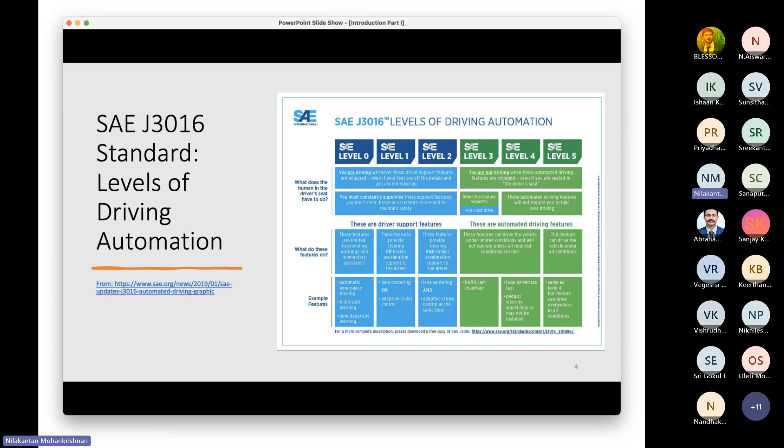Again, in terms of structuring the field that you're interested in, the world of robotics is divided into two areas. One is traditional, has been around, I would take a wild guess, since the 50s or 60s. We've had these robots, robot actuators on the assembly line, spot welding, and doing various other things, the old concept of Henry Ford and the way he changed the way something was manufactured. That is, the part itself moves on a conveyor belt and the human being is rooted to a spot. So those have been around for many, many years. I think they're called robot manipulators.

The idea is that these don't move except the arms move. The base is fixed, is what I meant. So let's quickly compare that versus the mobile robot. You do see a picture of a mobile robot, the bottom of the stack of two pictures. And that's a little bit confusing because it has a robot actuator on top of it. But imagine that we remove the robot actuator, then you have what would be considered a mobile robot.

So let's compare the two categories. And by the way, on the right you have a humanoid. That is the vanity of human beings, we like to see robots that look like us. And that is, I believe, Honda's ASIMO robot. So it stands up and therefore has to balance, which adds a level of difficulty. So let's compare the two.

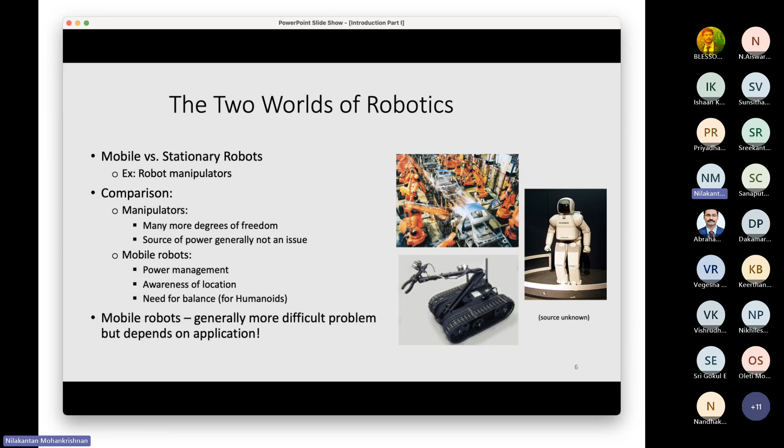So robotics is very interdisciplinary. First, you have the mechanical architecture. That could be how many tires you have, are they steerable, how far apart are they, the drivetrain, etc. And then the kinematics and dynamics of motion.

So we'll get into this later. Kinematics is different from dynamics. You have to know how the thing moves. You can separate them at a very elementary level by saying that if you're moving very slowly, then the dynamics issue is not an issue. But if you're moving fast, then you have to worry about dynamics in addition to kinematics. You always have to worry about kinematics, by the way. But dynamics comes into the picture if you're moving fast.

And then there's the sensors and actuators. What kind of sensors and actuators are you going to introduce in order to make the robot functional the way you want it to be? And then there is control theory, where you can take several courses on their own in electrical engineering. But a robot needs to be controlled in some way so that it does what you want it to do. That's the same for the first area of robotics. You have to control the end effector in some way so that it gets to the target. So control theory is lingering there in the background over everything the robot does.

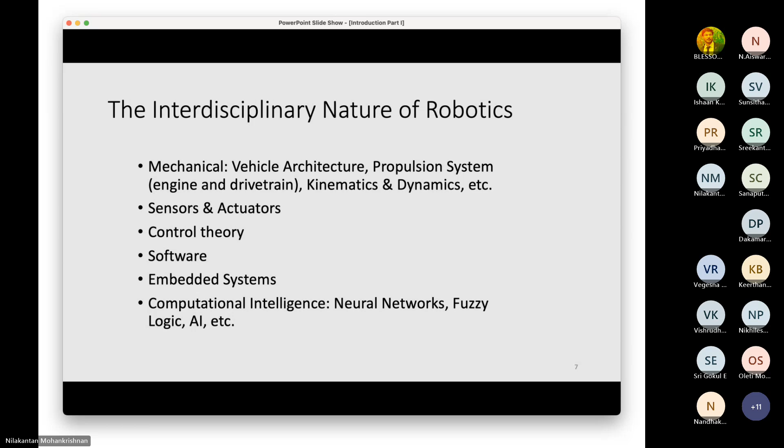The next sub-area is motion control. We already mentioned control, but typically we're talking about motion control. Deep down, there is a locomotion mechanism suited to the mission or task. Here you see a picture of one of the earlier Mars rovers - quite a fancy vehicle with 6 wheels, some capable of independently moving up or down. I guess they think you might have to go over a rock or something, though of course they make sure you're never forced to go over a rock just for fun.

But sometimes it's unavoidable - nothing is left unplanned for the Mars rover, since it's like a $1 billion vehicle. But they do give the tires a certain amount of freedom to navigate small rocks. So how do you control it? The vehicle architecture - how you design it in terms of number of wheels, propulsion, etc - is where you start. Then you figure out a control strategy based on your knowledge of how it's capable of moving. The locomotion mechanism is the system, and you figure out how to slap control onto it for the task - you're not going to run it like a Formula One vehicle. So the control is geared to the architecture, which itself is geared to fulfilling the task or mission.

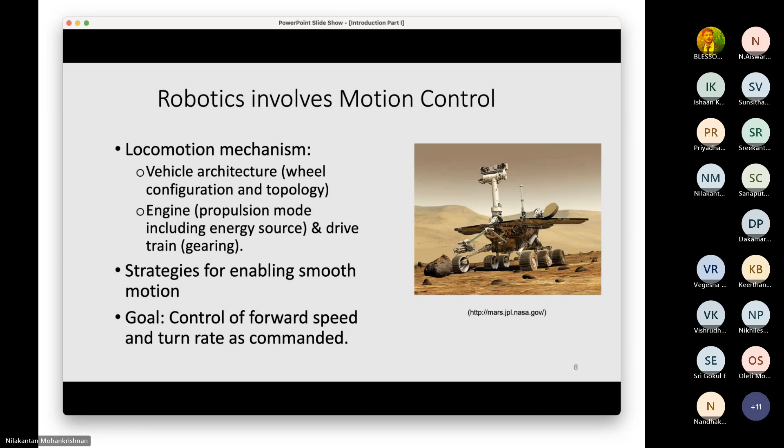Okay, so robotics also involves sensing and perception. I just dropped on the slide some of the most common basic sensors. There could be more exotic sensors, but these are the basic ones.

So you have LiDAR, which can also be three-dimensional. You see a picture of a LiDAR there. It's probably old by now because they are much smaller now. There's also one that is missing, and that is ground radar, which one of my students worked with.

The problem with LiDAR is that it tends to fail in bad weather. So Elon Musk, who owns Tesla, is completely against putting LiDAR on his cars. It's all camera based, optical camera based, because he just doesn't trust LiDAR in bad weather, like snow and heavy rain and so on.

Then on the right, you see a bumblebee camera. It's a stereo vision camera. We use our two eyes to not only view the scene, but also figure out depth. So depth perception is given by our two eyes, and that's what the bumblebee camera is on the right.

And then you have a GPS unit down below. That's the traditional GPS, but now you have something known as RTK, which improves your accuracy.

And then you have wheel encoders, which measure the rotation of the wheels, and in the short term can enable you to project where the robot has moved since the last time you collected encoder information.

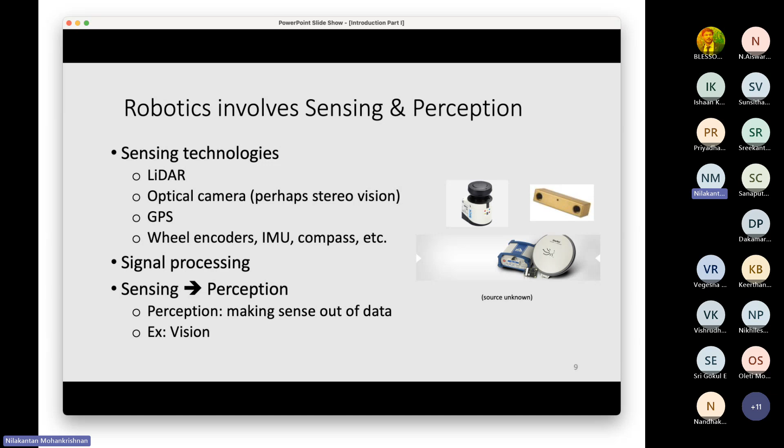And then finally, sensing alone is great, but you really need perception. You need to make sense out of what you see. So a raw image would just be like a lineup of pixels left to right and top to bottom, pixels meaning picture elements with different intensities. And we are so used to seeing meaning in the images that we see that we assume computers can see it too. Obviously that's not true. The computer first only gets the sensed image, and then it has to make some sense out of it. So it's kind of more difficult to get a computer to do what we do routinely.

They created a course in the desert and in fake urban areas, and one of those competitions was won by him. He was the father of the first self-driving car, the Google self-driving car.

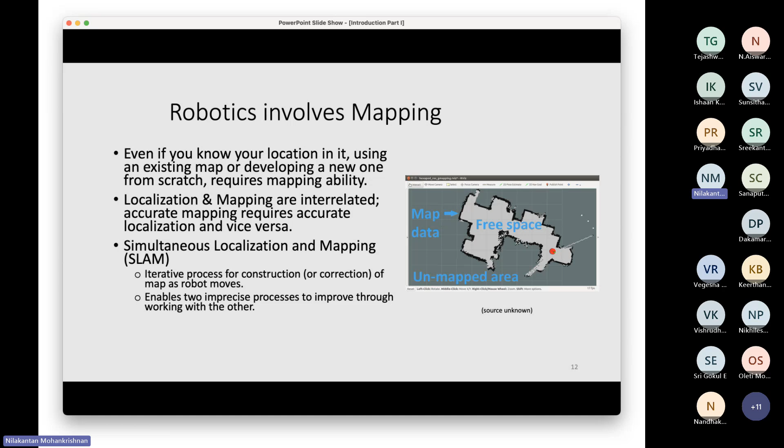SLAM is an iterative process. Construction happens if you did not have a map in the first place, while correction happens if you had a map but you're trying to make sure it's correct or augment it. If you had a moving object that was mapped, the only way to get rid of it is by looking at that spot, seeing nothing there, and wiping it off the map. That happens all the time - you're doing it in your mind as you drive. Things are being put on the map and pulled out of it. Even though these two processes are imprecise in themselves, by locking them together it's possible to have one dependent on the other and vice versa. So you can get fairly decent accuracy if you use localization and mapping in tandem.

I could use an example like making this robot capable of defusing a chemical bomb, but that would be so specific it would be boring for people. Path planning, however, is used by all robots. All robots that move have to use path planning, because in getting from point A to point B, they have to figure out an optimal path, not just a path like a drunkard would adopt - I'm not sure a drunkard could get to the goal, depends on how much he's been drinking. But you need to figure out a path. So that's the example I use.

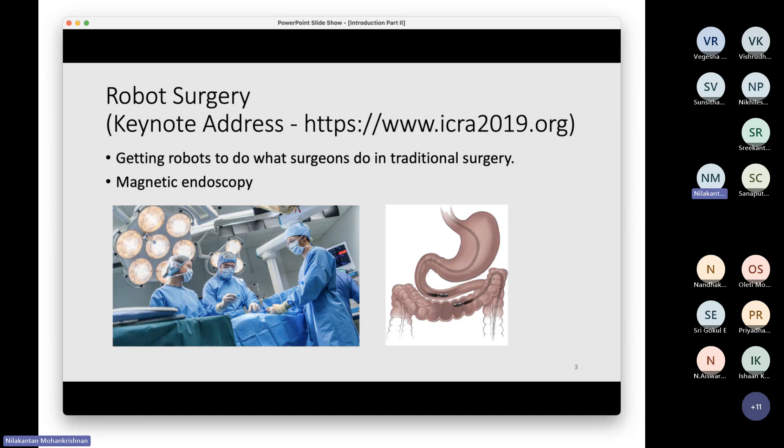So there are all kinds of implications if you can send nanobots into the body and target the delivery of drugs, or even time-target it, meaning you don't want the dumping of the entire dosage, but maybe you want a slow release pill or something. So all of that can be done with nanobots of the future.

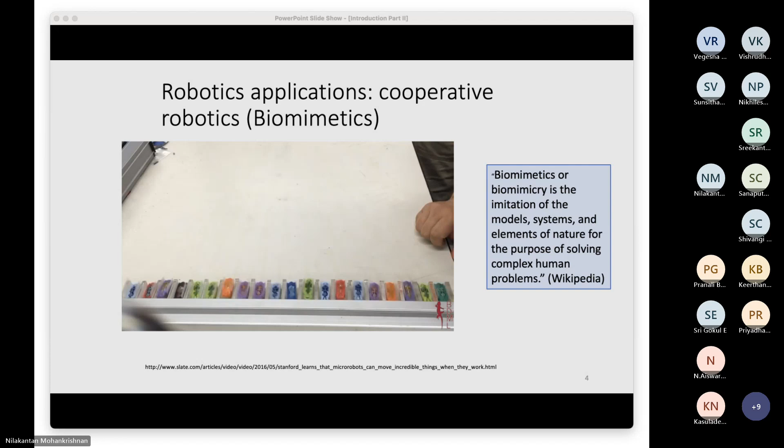So perhaps that's what it is, because I'm opening up more and it says record and transcribe, meeting info, video effects. Is it video effects? Maybe. Could be. No, that's not it. What if I turn on my speaker for this? Then they'll be able to hear it, I think. Shall we do that? I think so. Okay, I think we can give it a try. Okay, hold on a second, I got to start again.

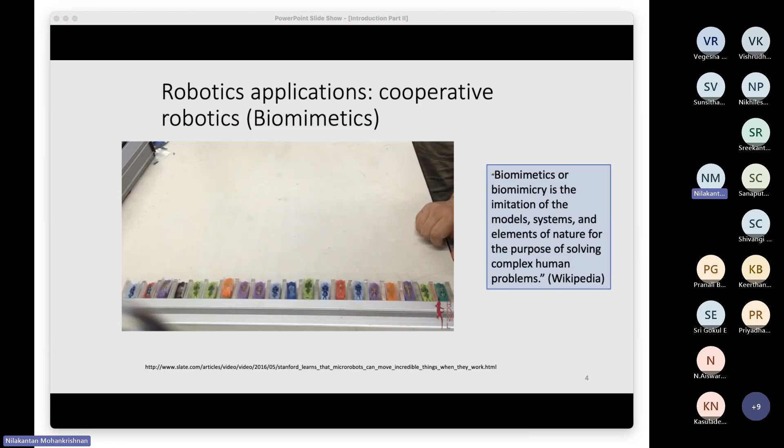Are you still seeing my shared screen? Yeah, I can still see the same screen. Let me pull it back.

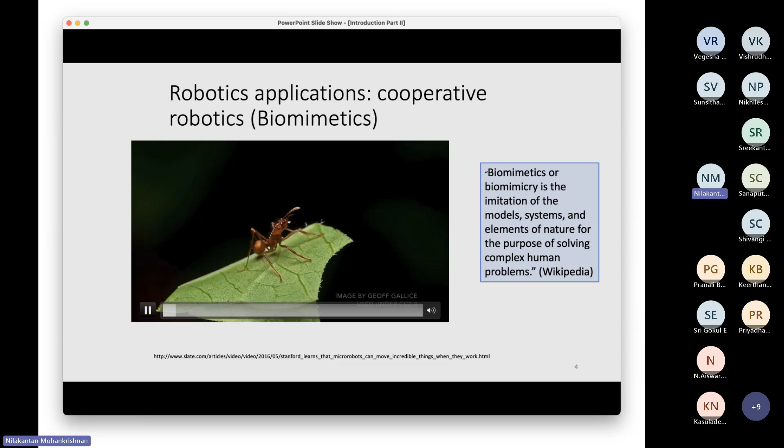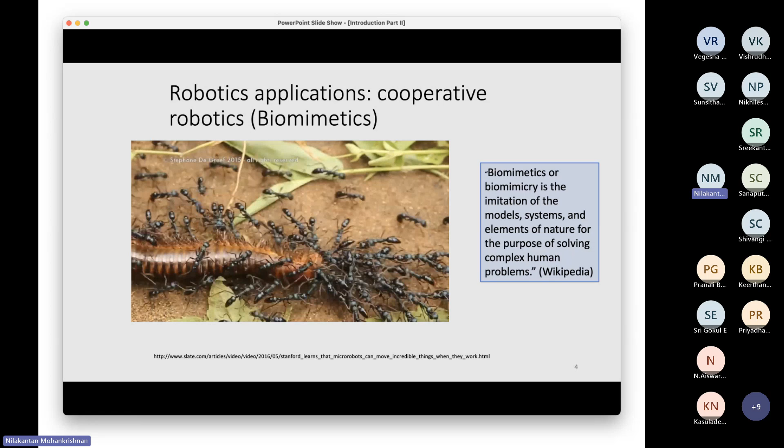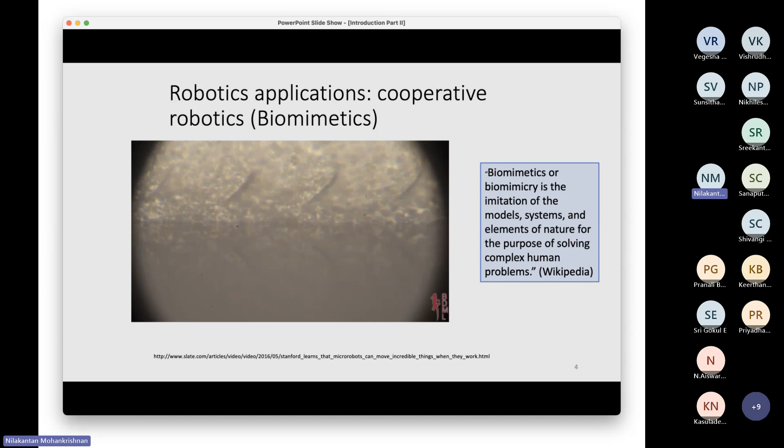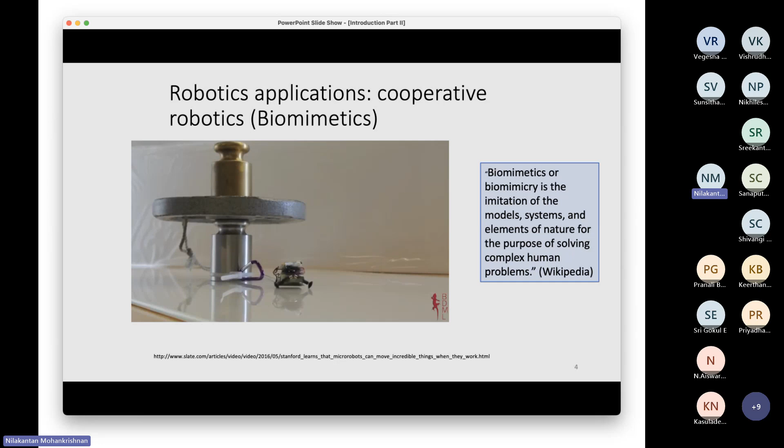Let's try it now. Scientists love studying ants. Known for their impressive strength, ants can lift over 100 times their own weight. Here, a swarm of ants works together as a team to move a giant millipede. With no space to grab onto, the ants make strong chains by grabbing onto each other. Here at Stanford University, we're interested in learning about how tiny things move objects much larger than themselves. Using a special adhesive inspired by gecko toes, our microrobots can move objects over 2,000 times their own weight. The question is, like ants, can our robots work together to accomplish great things? Some microrobots, like these, move forward in jerky jolts. Their forces are strong but short, like the quick beat of a drum, so they don't overlap much and don't work well together.

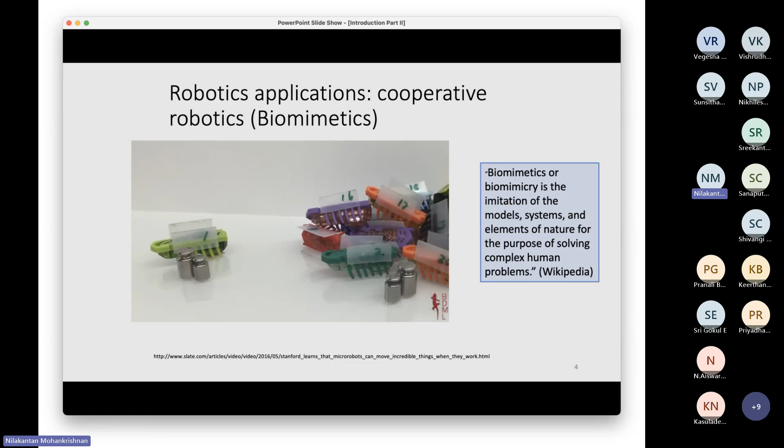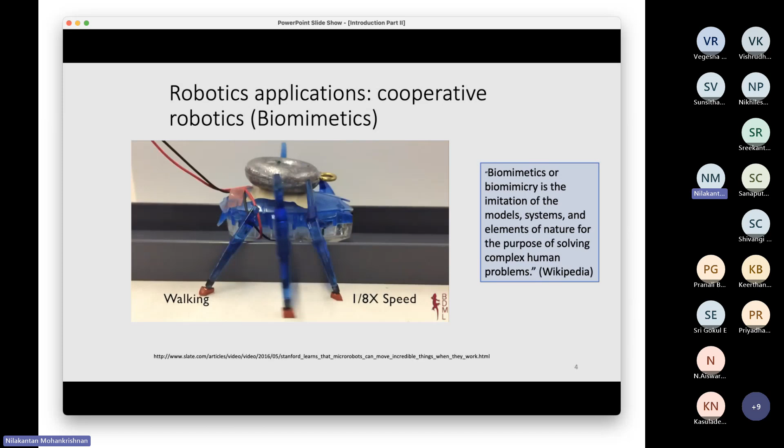20 robots only apply 2 times the force of a single robot. Walking robots like this one apply forces over a longer period of time. Although the forces individually aren't very strong, they overlap with each other more easily, so teamwork is better.

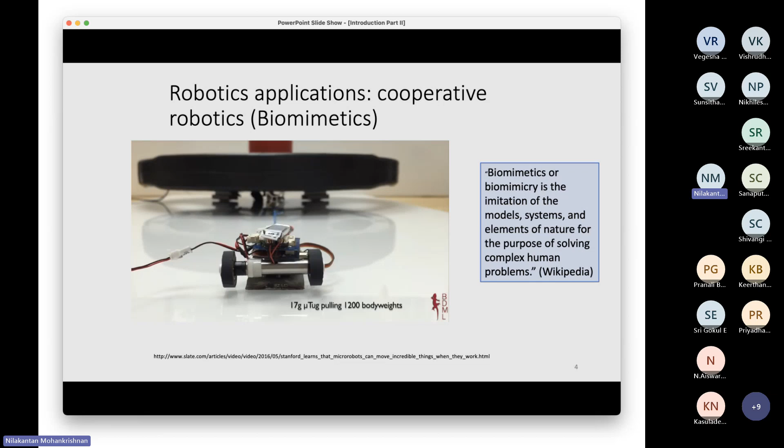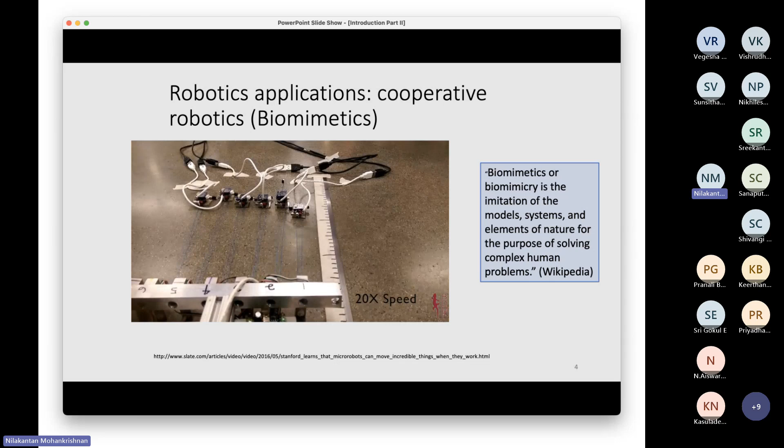After a series of experiments, we found that the best way for robots to work together as a team was to use a very long, very slow, but very steady winching gait, like our team of micro robots here. With near perfect teamwork and impressive individual strength, this team of 6 microtugs, weighing only 100 grams, moved the author's unmodified 3,900-pound, 1,800 kilogram, car and driver, shown here at 20 times speed.

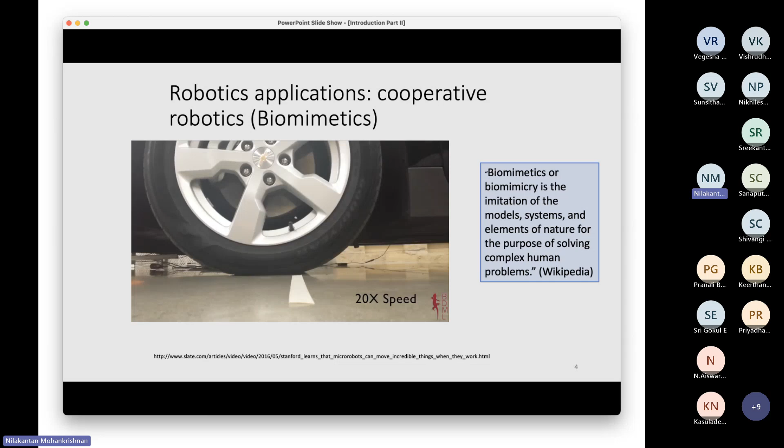Okay. You're able to hear, right? Yeah, we were. Okay, so let's move on to the next slide.

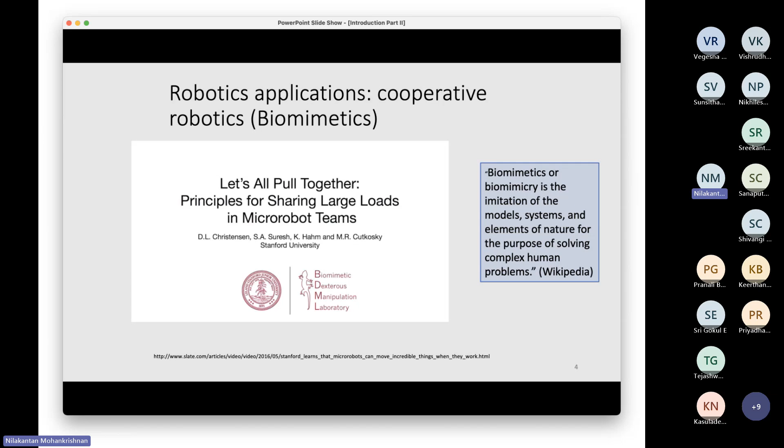Scientists love that slide. Okay, so that is an area called biomimetics. We often look for guidance from nature and then try to make a computer take on the same attributes, because nature is a good place to learn.

But obviously the problem is that animals don't talk to you, and sometimes the animals never even lived in the same era as a human being. So here's an example of a dinosaur, which became extinct before the first human being. The idea here is again, I think from Stanford or one of the elite schools. The idea is to make that little truck have a long tail, because it was surmised that the dinosaurs used it when they jumped off like a short cliff, 10, 15 feet, to prevent themselves from overbalancing. They used that tail and the distribution of weight by moving the tail around in order to keep themselves aligned. So this is from a research paper several years ago.

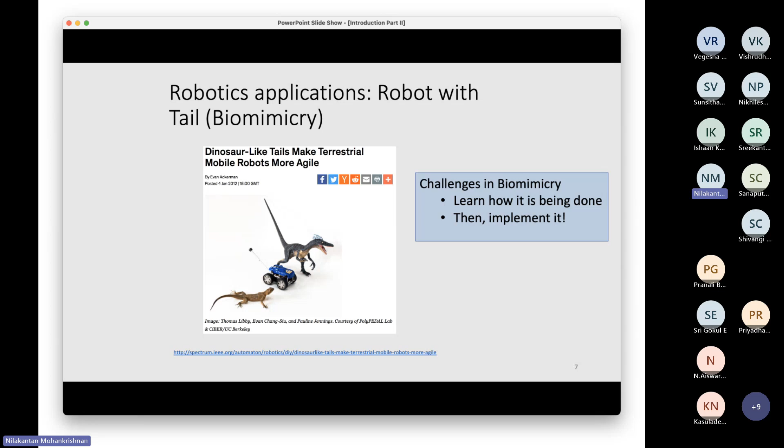So we're going to play this also. And again, you'll be able to hear the audio through my computer pickup.

Are you able to see? No, you can't. Hold on. I don't think you can. We are exploring. Just a second, because it's now going to my browser. Yeah, I think. I think you'll have to share the browser. Yeah, so I got to stop sharing and share the browser. Okay, share. Can you see my browser? Yeah, I can. Okay.

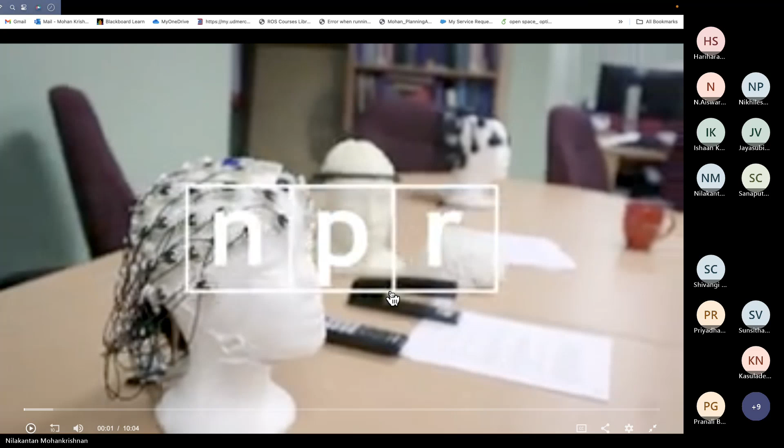All right, picture yourself inside a robotic suit, one that lets you pick up, say, huge, heavy objects, just like a superhero. This is really a thing. Robotic exoskeletons, as they're called, are being used on the floor of hardware stores, also other places like that, so workers can lift heavier loads, and they're controlled by those workers' movements. But the more advanced exoskeletons are controlled by the mind, and they can help paralyzed people, even children, walk. NPR's Elise Hu has been checking all this out for her video series Future You about how emerging technologies could change life as we know it. And Elise is back with us. Hey, Elise. Good morning. Just to be clear, this kind of stuff exists today. And the most promising ones of these exoskeletons are powered with thought control, as you mentioned.

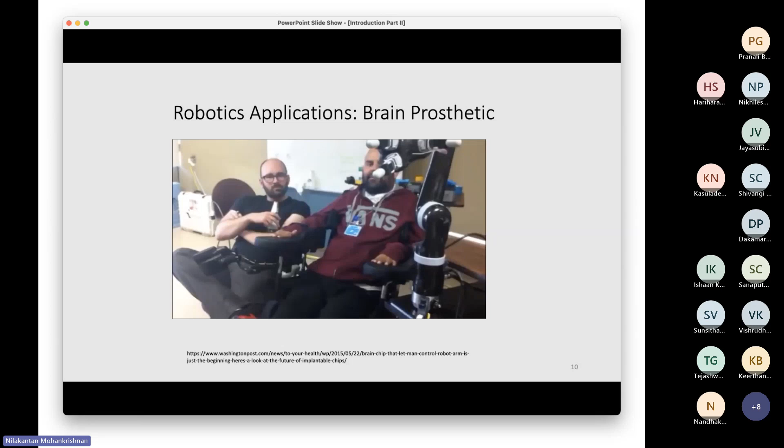So I was saying that this is an older video, same application. I'll let you watch it on your own.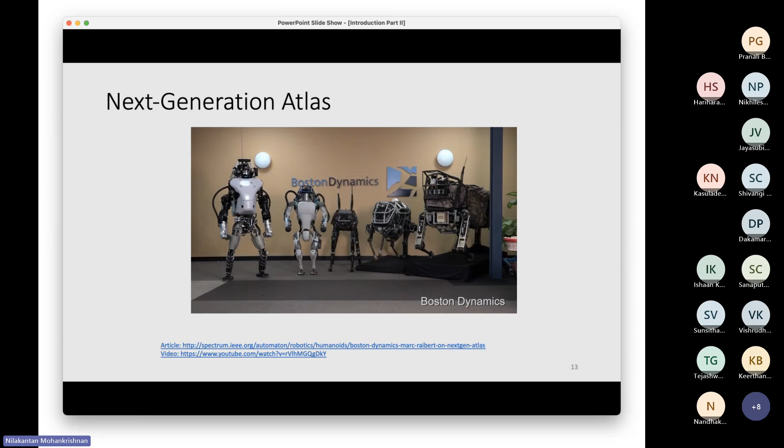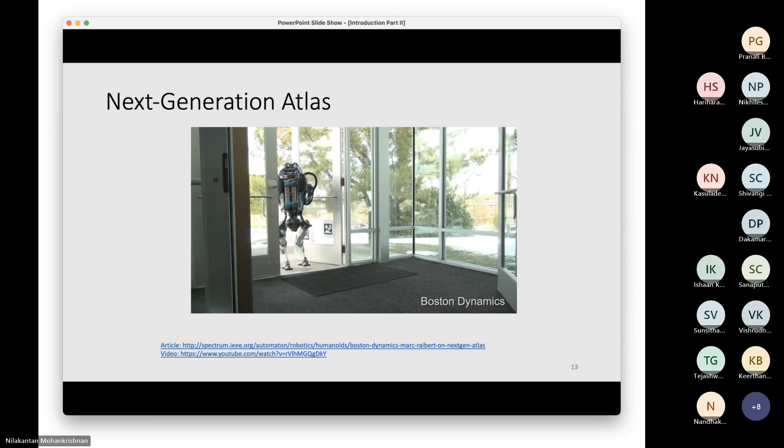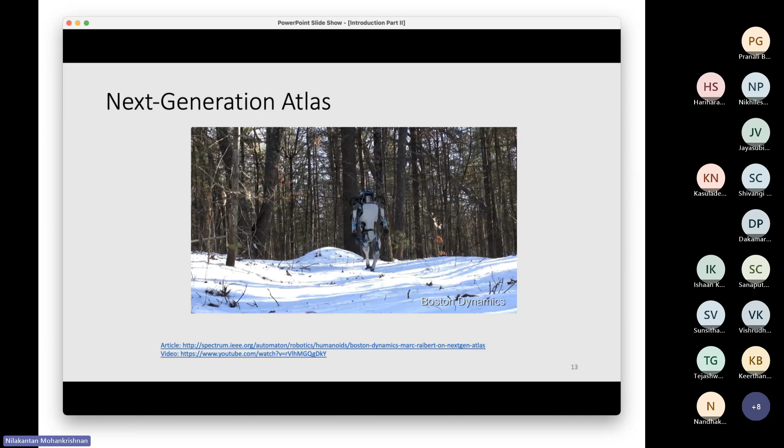Now I wanted to just go to the next slide. Let's watch this a little bit. Luckily I don't have to go off screen. This is from Boston Dynamics, one of the best robotics companies in the world. This is a humanoid robot, and that's a remarkable control system you're seeing. Walking on snow is not easy for many of us, particularly as we get older. Right now it's a curiosity because they haven't found something it can do that is useful for society. It's a curiosity, but I guess the applications are still to come.

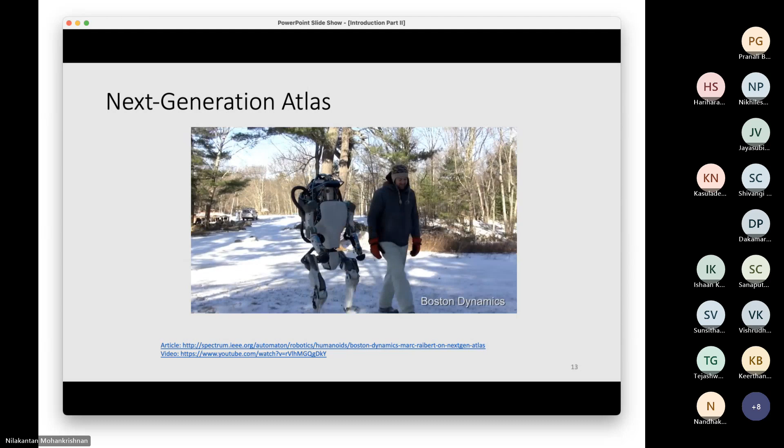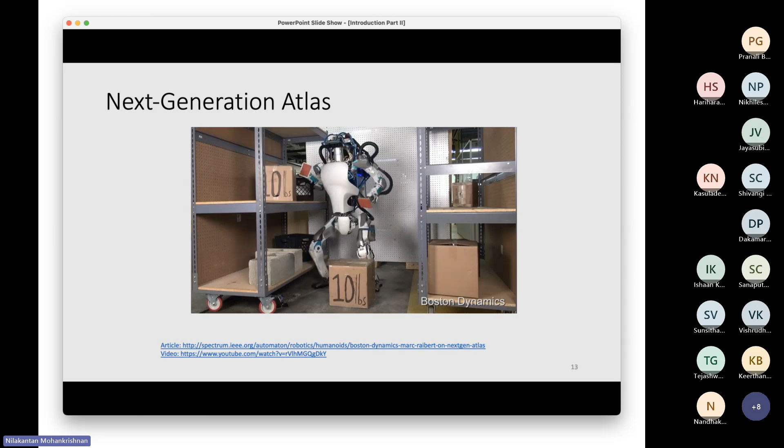That's an elite control system, not something that can be done in the course of an afternoon. I guess the application they are looking towards is some kind of Amazon warehousing task where they get rid of all human beings. I'm joking, but that's obviously the intent of many of these robots.

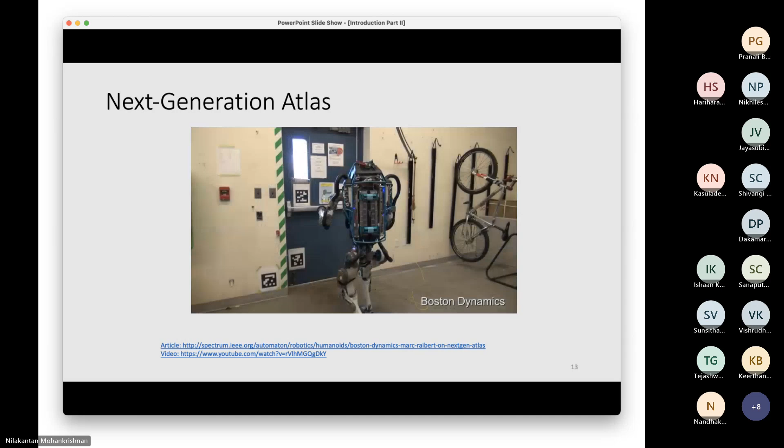Sir, should you just hold on? I kind of muted you because there was feedback, and now I'm unable to unmute you. Could you just wait a second? Can you hear me now?

Okay, so one of the things you may have noticed is that they have reduced the degrees of freedom in the wrist and fingers, because, human beings may disagree, they are generally unnecessary for many tasks. So they've just given it a wrist as it picks up boxes and shelves them. As I said, I went in and out, so I don't know how much of what I said was picked up by everyone. They're trying to create these warehousing robots. The idea is to get rid of human beings. Hopefully they find other jobs for us. But that's the idea, that Amazon will run a warehouse completely with robots and maybe a couple of human beings.

This one I'll let you watch on your own. It's the same robot, the Boston Dynamics robot. I don't know what that particular robot is called. It does an amazing backflip. A robot doing a backflip, one of the most complicated things a human being does, and most of us cannot even do it. They get this robot to do a backflip off a table.

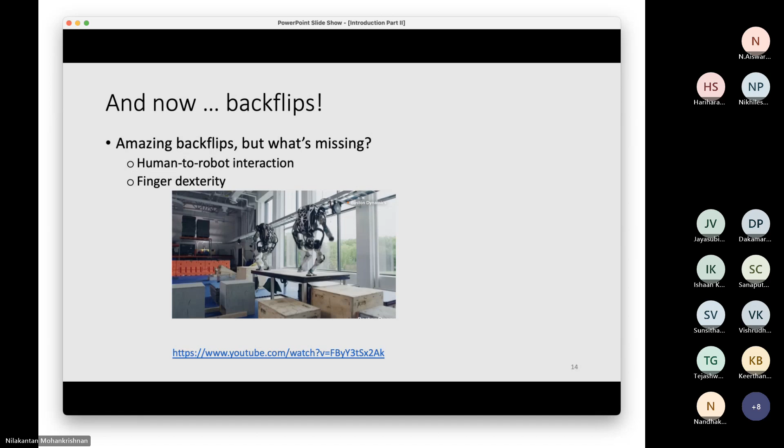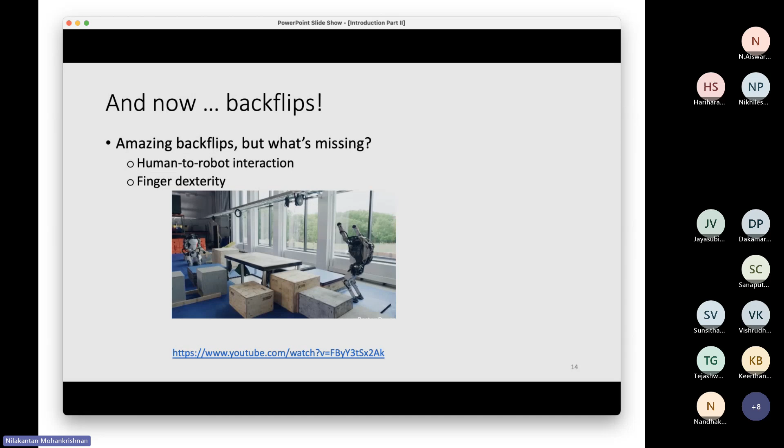Oh yeah, this is the backflip here. This is Atlas, I think. What's that? This is Atlas. Its name is Atlas, I think. Atlas. Yeah, I remember now. Decade of hydraulic humanoid robotics work at Boston Dynamics. Atlas stands about 5 feet tall, weighs about 190 pounds. It's battery powered and hydraulically actuated with 28 degrees of freedom. It has RGB cameras and depth sensors, which provide input to its control system, and all of the computation for control, perception, and estimation happens on board.

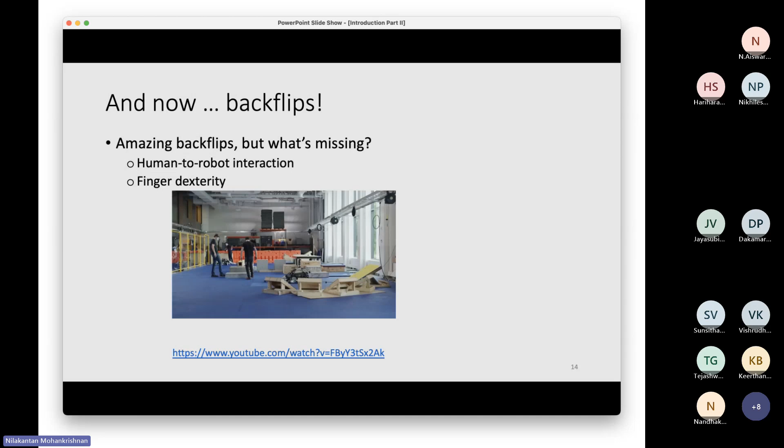Parkour is a useful organizing activity for our team because it highlights several challenges that we believe to be important. First, how do we build a high power density mobile robot that's capable?

Okay, so you get the picture. The point is, people don't have time to burn funding them unless you can turn it into money some way. So it's kind of a nice curiosity, but they might just be about to turn the corner in terms of making it produce a revenue stream. Because otherwise, even venture capitalists will not fund forever.

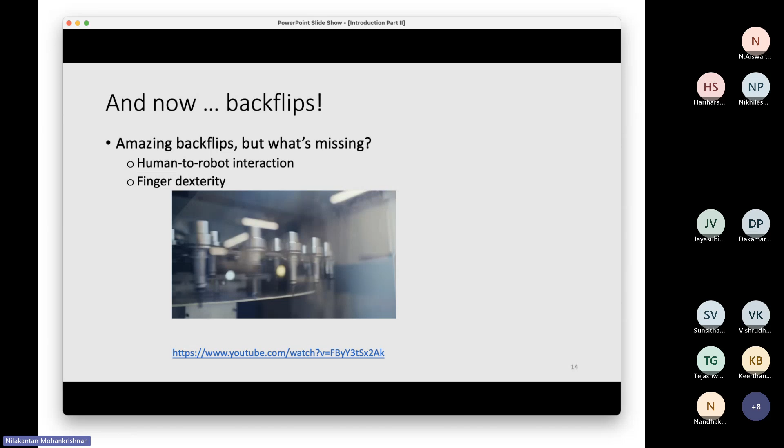So this is the four-legged version. You can watch it. It's quite funny actually, because there are human beings in this video that try to kick it, but maybe you'll watch a little bit of it.

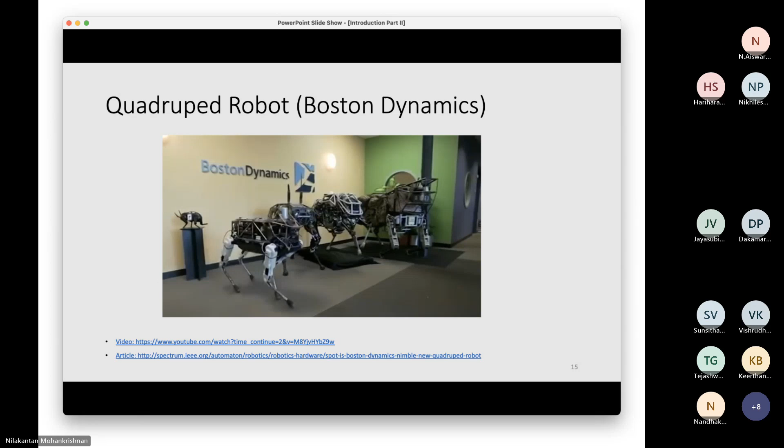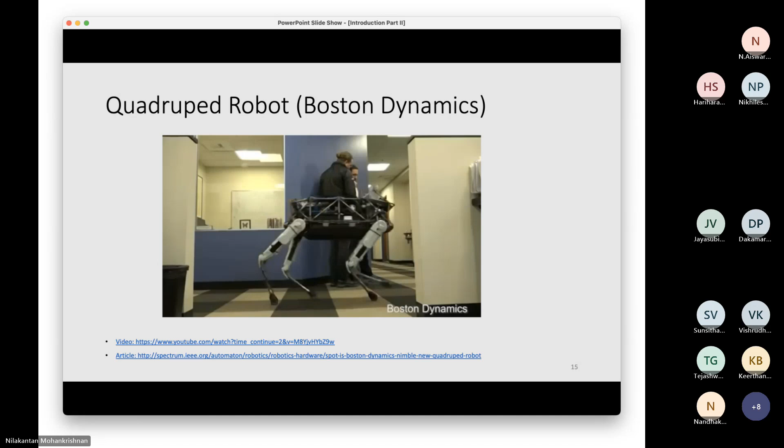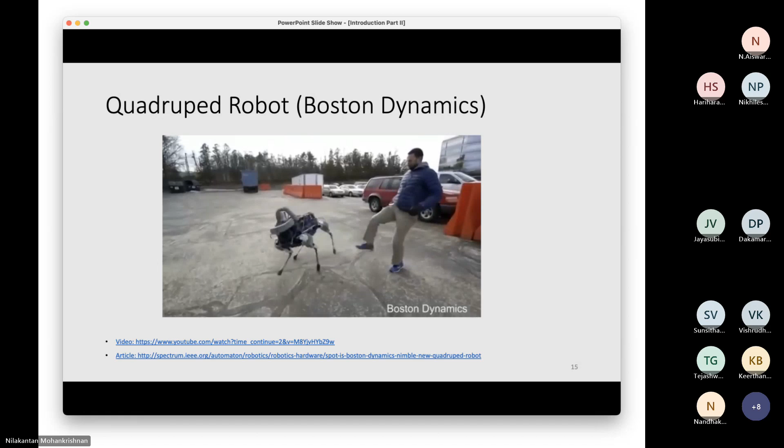That's what I meant. Okay, we get the idea.

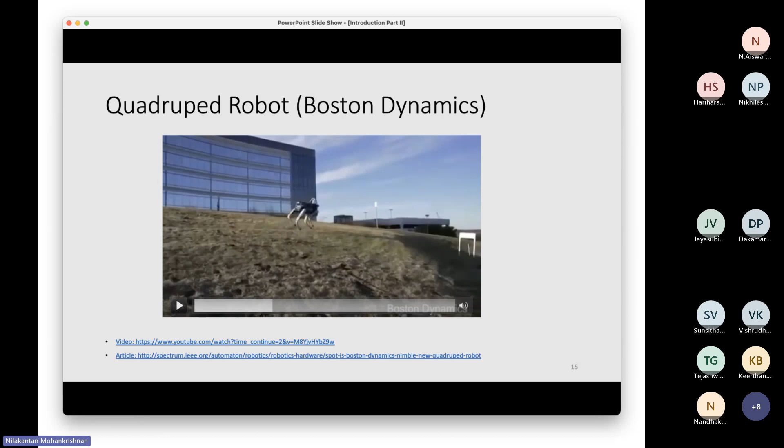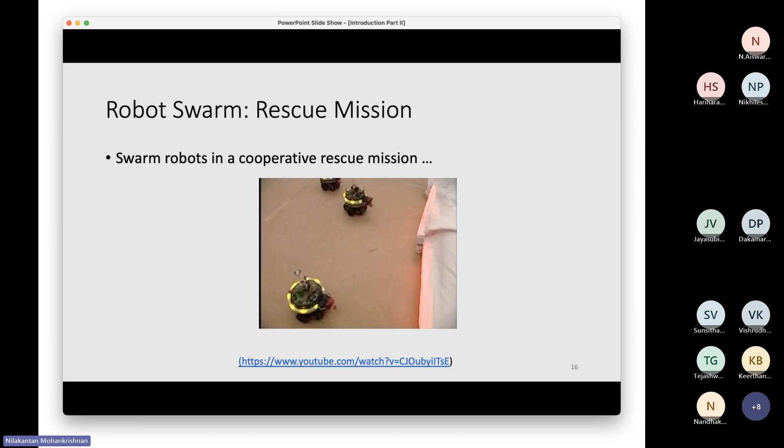So swarm robots, they line up 5 by 5, I think, but I think it's one robot short because maybe it wasn't working on that day.

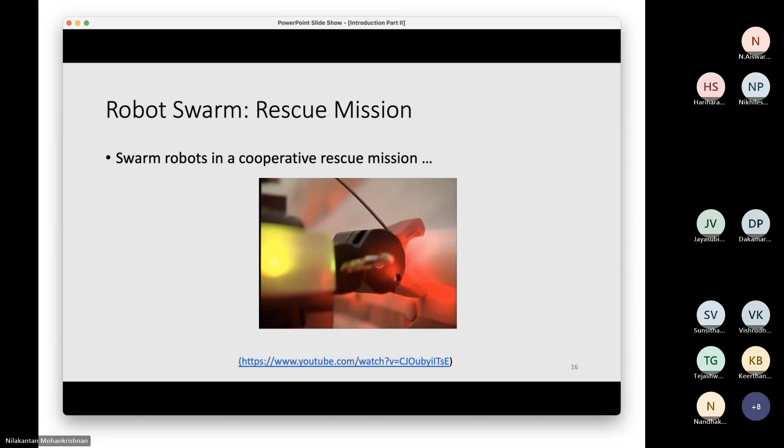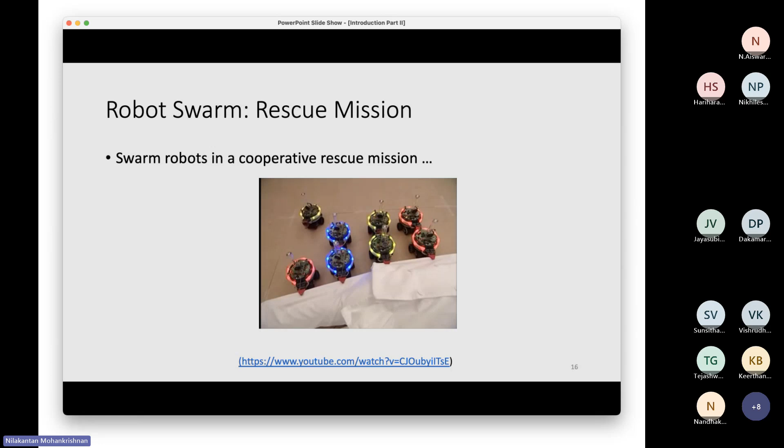So the color indicates the team color: red, blue, yellow, and red again. And it'll change color the moment it locks on. Yeah, there—blue and blue, yellow and yellow, red and red. And then we'll have red and red here.

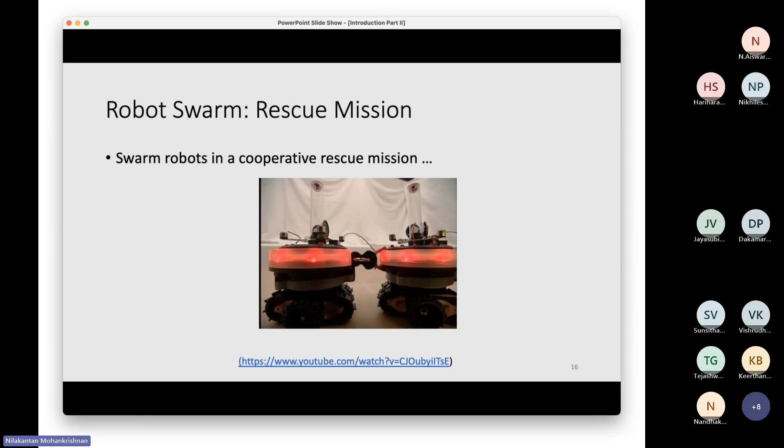So this is a very difficult project, even at a master's level for a course, in connection with a course. It's not easy to do, though it looks easy. And it doesn't matter who has done it and posted something on the internet—when you do it yourself, you have your own special problems to overcome.

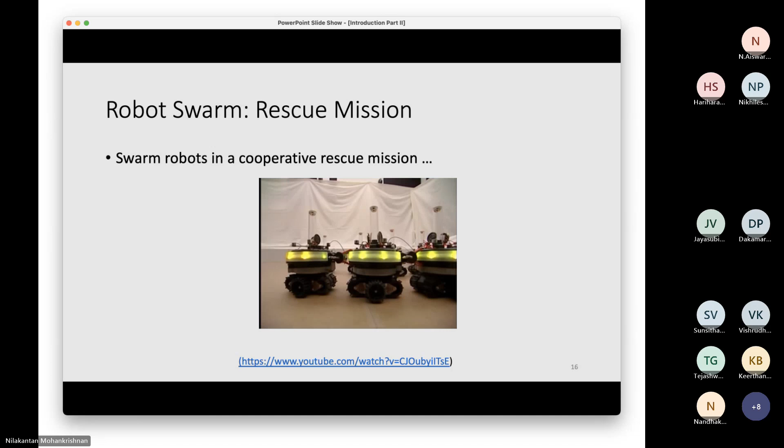So it looks like we'll be one robot short. That robot is probably taking the day off, though they're not supposed to be human beings, who are the ones who love days off.

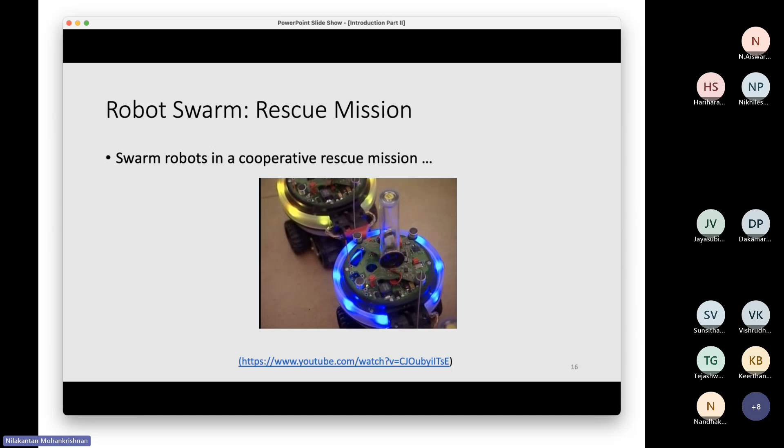So some guidance is involved. I'm not sure what system they use, but it has to find that hook receptacle. And yes, we are short one robot today. Looks like that robot changed his mind at the last minute.

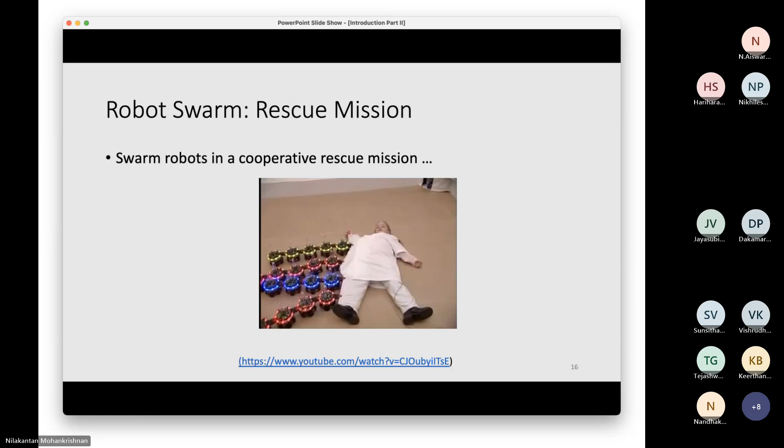So obviously they've designed the clothing of the child so that it's easy to grab onto. If you have an earthquake zone and there are people lying injured, their clothes are not going to be the same, I would think. And you see the child is being dragged to safety—so a nice application.

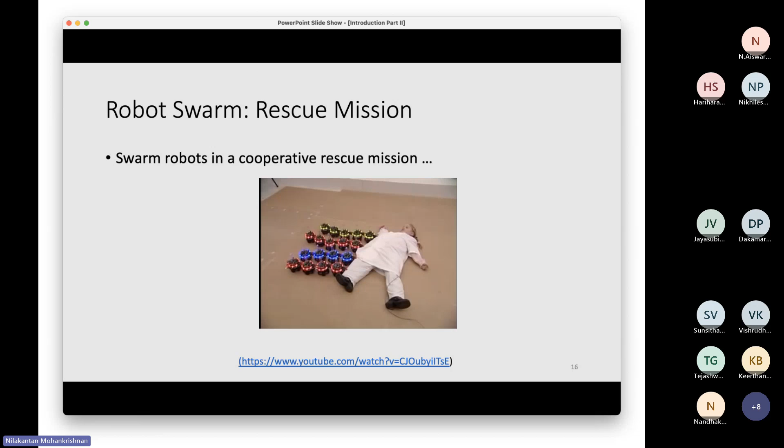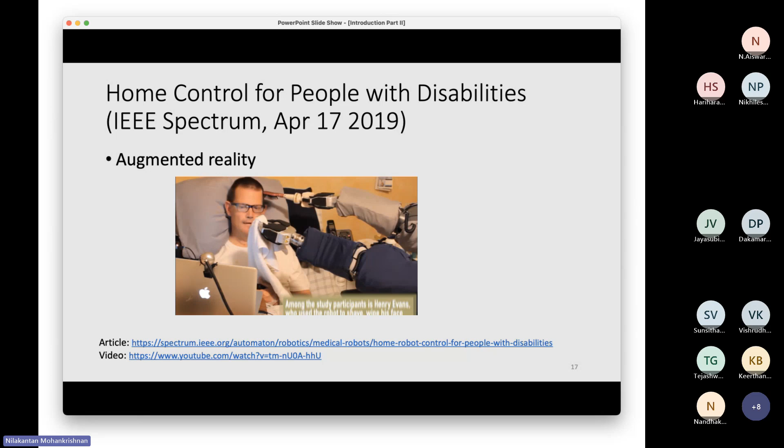Okay, you get the idea. Well, haircut—I don't know how many of us are ready to get a haircut from a robot.

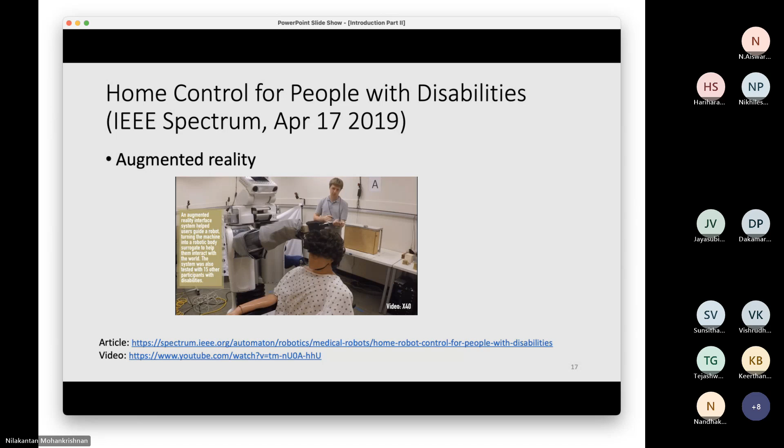All right, so I found this very interesting. I think it was an IEEE Spectrum magazine. And you can see what is being done here is it's much easier to get a robot to copy what you're doing. It's much harder to invest autonomous intelligence into it.

So human beings can show how to do something, and if the robot can imitate it, then you can address situations such as after the Japanese tsunami, where a particular nuclear reactor was submerged or flooded, and they had to turn off certain valves and take care of some kind of partial cleanup, etc. The idea is that if a human being could show a robot what to do, like grab onto a doorknob and open it, then it's much easier for the robot to do that. If the robot has to identify the doorknob and figure out what to do on its own, it's much more difficult. So the HMI, I think, stands for human machine interface.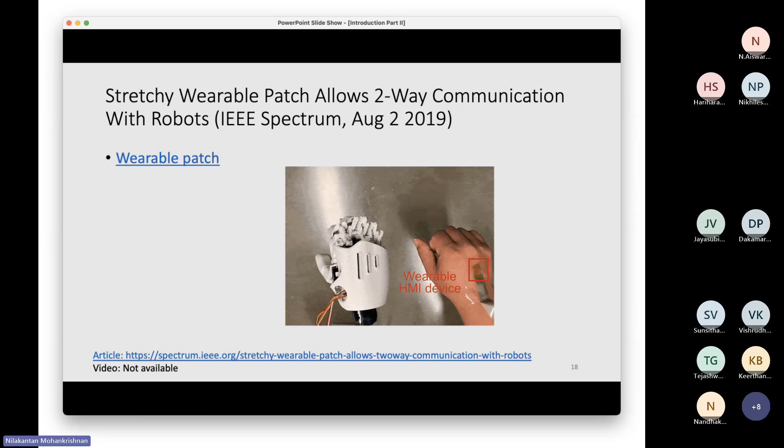I could be wrong, but this video is an endless loop, and I think we have seen enough. So the human being is wearing a patch that picks up the contractions of the muscles and transmits it to the robot.

In the US, you have the ADA, the Americans with Disabilities Act, if I'm not mistaken. It's a law passed several decades ago that forces all buildings to be compliant with wheelchair access. Every new building has to have it, and every old building has a certain amount of time before it's also forced to comply. So it's a law that enables somebody who's completely disabled in a wheelchair to move along the rim of the Grand Canyon, one of the great attractions in the US. They've created a 3 or 4 mile walkway right next to the top of the canyon so people can walk or drive around in their wheelchairs.

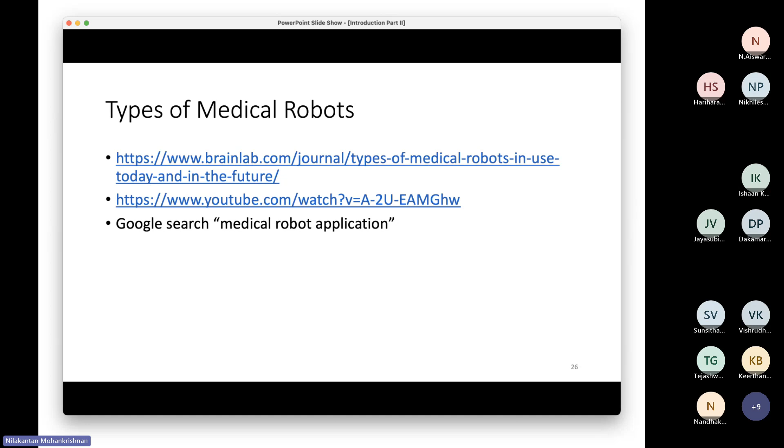So this, I introduced some examples for medical robotics, that it's a specialized area of robotics, both of these slides. And that's where we are.